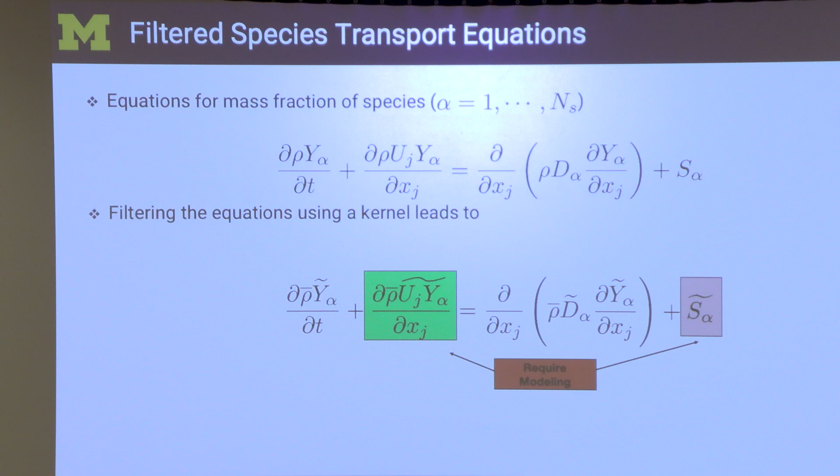Now, the chemical source term, if you think in terms of scales, is going to be active at a very small scale because reactions are confined to a very small region. So in terms of length scales, it's at a very small scale. If I say I filter that source term, I'm essentially saying all the contributions at the small scales, I'm going to set to 0, okay? Which means there is no chemical source term after that because everything is at the small scales.

So if you follow that logic, filtering that source term is the end of this whole exercise. Once you do this, the equation is meaningless. You cannot solve it. There's no point in doing LES for combustion, okay? So we have to find a way around it. Just directly filtering the equations like this is not the solution. And I'll explain this in the next few slides using certain examples so you see what the mistake we're making is quantitatively.

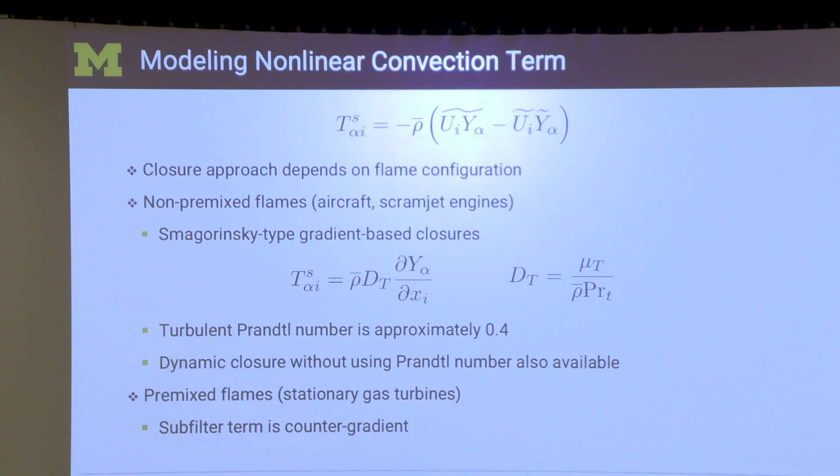So first, for that pesky UJY alpha term, which I'm going to write like this. If you remember from yesterday, that's how the subfilter stress term looks. So it's very similar, and I can use these kinds of models. These are called gradient diffusion models. Some people think it's good, some people think it's bad, but nobody has done anything better than this to this point. So we'll assume that it's a good model. This is not critical for us. It's important, but not a critical modeling requirement here. So we'll keep it at this level of exposure for this term. What is more critical for us is the chemical source term.

Okay, and of course, you guys know this. All of chemistry, if you want to model it, fuel does not become carbon dioxide directly. There are multiple steps, right? We know multi-step chemistry. So we have a chemistry mechanism, and you can use Cantera or Chemkin or whatever software you have to read in a file that someone like Professor Curran or Hai Wang or others give you, or you're the one developing this if that's what your PhD research is on, and then use it in a CFD calculation.

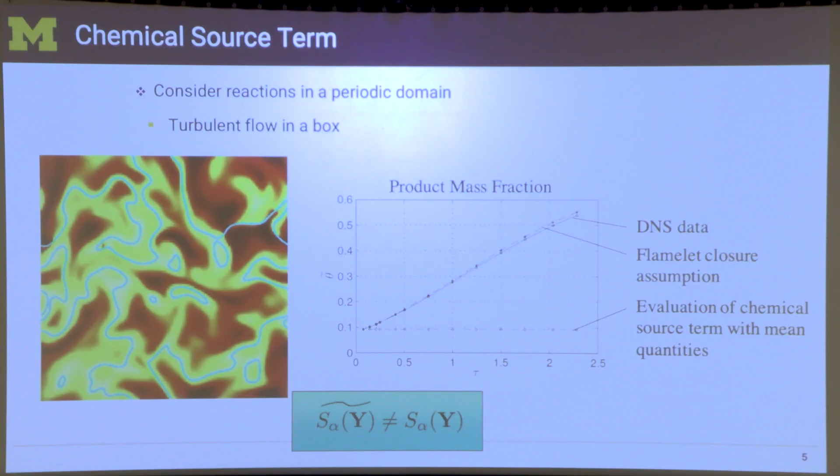In the previous slide, if you look at the equations you have, I'm going to solve transport equations for C. That will be Y1, let's say, and D, which will be Y2, Y alpha, so alpha is 1 or 2. I'm going to solve transport equations in LES for filtered Y1 and filtered Y2, filtered C and filtered D. So if I want to compute this chemical source term, if I know the filtered temperature and the filtered Y and filtered T, I can plug all of this in to compute the chemical source term. So that would be first filtering the signal for composition and then computing the source term, which is a very nonlinear function. And it turns out that that gives extreme errors. If you do this, you don't get any combustion at all, okay?

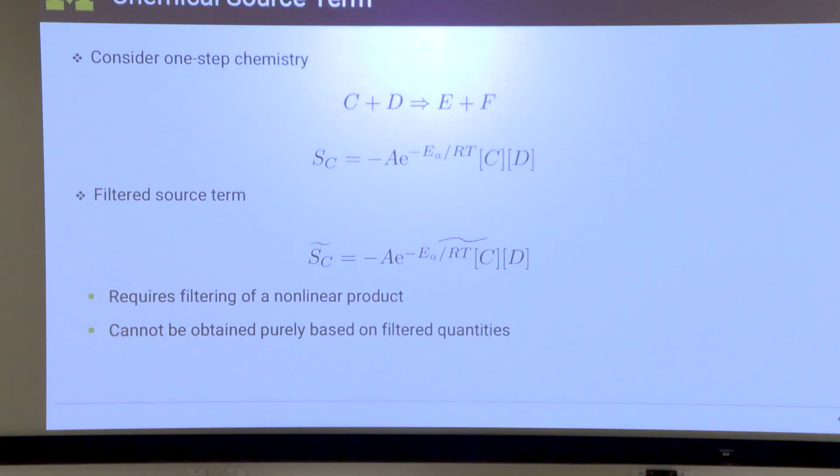So this is the fundamental problem with combustion modeling. So everything that comes after this is a way to fix it. Somehow we need to fix this fundamental issue. And there are many ways to fix this, and people have come up with many different ideas.

And there are a sequence of ideas for this from things that have been done even before LES was formulated for other kinds of simple mathematics or simple models, all the way up to more extremely modern technologies. Like, if you have the filtered signal for composition, can you use neural networks? I hate saying this, but using neural networks to figure out the filtered chemical source term, right? Stuff like that. So that's this correlation that you can try to get. So there are a lot of ideas that have been pursued like this.

So we'll go through one or two, and then I'll tell you what's the more dominant way to solve this that actually makes sense. So the easiest way to do this is this. You say that the filtered source term is evaluated using the source term of the filtered variables, which does not work out, so that's not an obvious choice. So I can come up with expansions, like Taylor series expansions. So instead of having T as being T filtered or T average plus T prime, I plug it in, and now I have a completely different expression for how to compute chemical source terms, or in this case, temperature source terms. That's a little bit more complicated, but it takes into account the fact that there is not a single temperature, but it's a filtered signal. Yeah, so you can make these assumptions there.

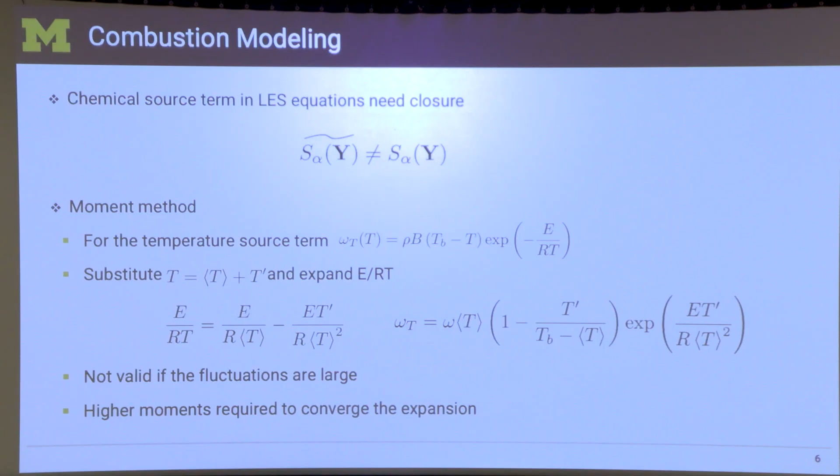What you'll quickly find is that these methods are not extensible. That works only if you have a single-step chemistry. If you have more complex chemistry mechanisms, if you want to predict pollutants or soot formation, for instance, these will not work. So you need to come up with something that's more principled. In machine learning terms, this is called physics-inspired modeling or physics-informed modeling, right? So you have to know something about the physics of the flames, and you can incorporate this into the simulations, and that way you're closer to reality than just doing mathematical expansions.

And there are many classes of methods. In fact, many of the people who give these summer school lectures, if you go back and look at them, they're all associated with this. They would have come up with one of these methods. Okay, this is a path to glory if you're a combustion researcher. You come up with your own combustion model, and then, of course, you don't name your own combustion model after yourself, which is looked down upon. But otherwise, they would have built this one.

So, for instance, the flamelet methods, which fall under manifold-based methods, Norbert Peters and Forman Williams came up with this technique. There is the conditional moment closure, which Bob Bilger and Alex Klimenko derived. I do not know where the eddy dissipation concept comes from. It predates all of LES. The transported PDF methods come from Steve Pope and originally from others in the turbulence field. And these are all only when you have diffusion flames or non-premixed flames. If you have premixed flames, there's a whole other group of researchers who do this stuff.

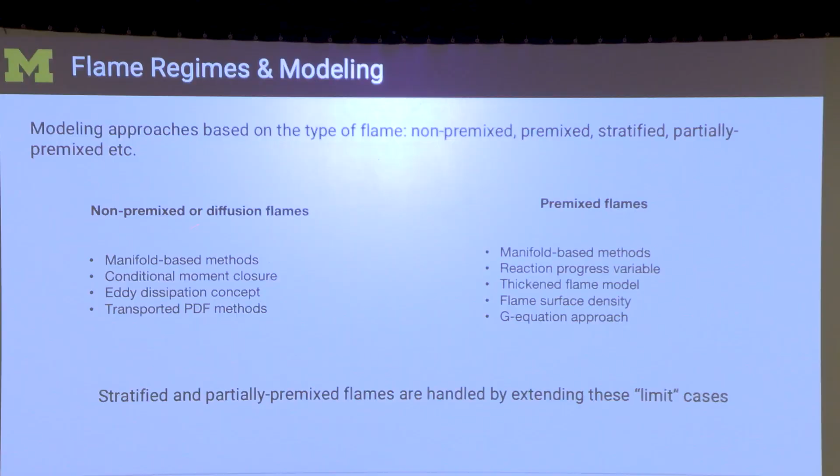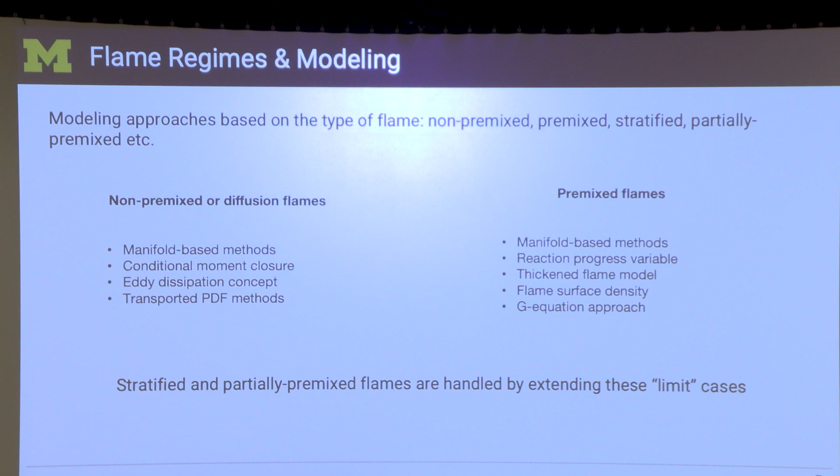Now, you have to know that diffusion flames are more popular for aircraft engines because their fuel and oxidizer are put in separately into the combustor. And premixed flames are more common in stationary gas turbines. And I don't know the history of this, but for some reason, in this country, diffusion flames are studied more commonly. And in Europe, premixed flames are studied more commonly. Not that they don't look at diffusion flames or we don't study premixed flames. It's simply that if I look at these methods, the people who build the methods are either from the US or from Europe. It's like that, right? So that's what you see from this.

Yeah? Why are diffusion flames more common in the aerospace industry? Why won't they use any premixed in aircraft engines? So if you mix fuel and air and you let it sit in any volume for appreciable time, it's dangerous, right? And aircraft engines have to be compact because volume and size are limitations. So you cannot have extra measures to ensure safety very easily. So the better strategy is to bring them in only when they need to react.

In stationary gas turbines, you can have additional measures to protect or mitigate these risks. They can be longer volumes, things like that. And so as a result, they operate in premixed. Now, there's also a secondary thing, right? Diffusion flames produce NOx. Premixed flames can be run very lean, and they don't produce NOx. And because premixed flames in stationary gas turbines sit on the ground, you do not want to release NOx at ground conditions, which can be very detrimental to humans. Not that we can release NOx at high altitudes, but that's what we do.

Models for the flames. Is there any way to couple them, or is there any model that can take care of triple flames or any sort of intermediate flames? Yeah, so although I say as if there's a stark distinction, that aircraft engines are purely diffusion flames and stationary gas turbines are purely premix flames, that's never the case. They're always somewhere in between, right? It's simply that stationary gas turbines are more towards the premix side, and aircraft engines are more towards the non-premix side. For your question, that's the bottom one.

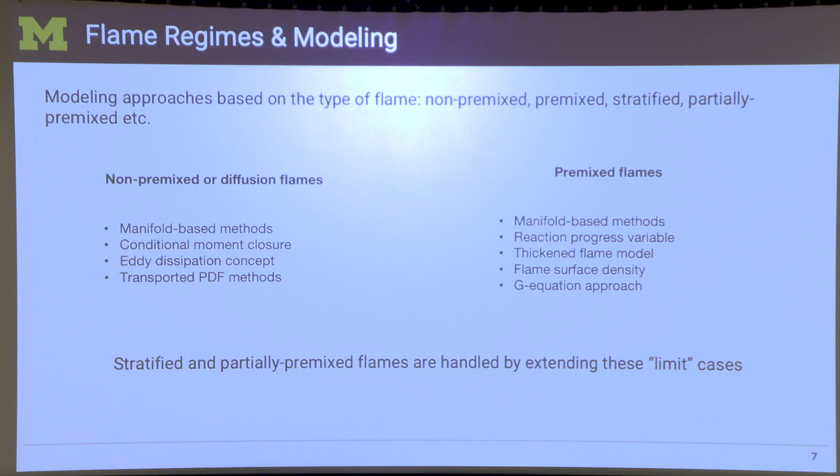Stratified and partially premixed flames are the typical norm. And so there you have a variation. If it's a premix flame, you have variation in equivalence ratio throughout the geometry, and so that's stratification. In partial premixing, you have some amount of maybe products mixing with fuel-air mixtures, things like that, and they will lead to structures like triple flames, lifted flames, and so on. Then it becomes very murky. We don't know how to deal with it, and what we typically do is some ad hoc way to extend the premixed or diffusion flame models. We have gotten much better at it, so now the manifold methods we talk about can cover a broader range. I'll show you some examples. But it's not a settled question. It's not like we know, okay, if you do this, you can solve those problems.

Any other questions? Just broadly speaking, are the combustion regimes in rocket engines for this discussion pretty much similar to that of a jet, or are there other differences? Yeah, so they're fully non-premix. That's right. They're all mixing limited, scramjet engines too. They're all roughly the same.

Is there any notion that if the fuel and air, or in a rocket engine the oxidizer and fuel, are mixed properly before the combustion, then the combustion will happen properly and emissions will decrease? Yeah, so ideally, if you can mix everything properly, and you can also burn. I'm not trying to trivialize it, but this is our thinking, right? We think if we mix properly and we can burn it well, everything will be perfect. But our limitation is fluid mechanics. If you try to mix properly, which means fully mixed, there'll be consequences for it. There'll be pressure losses. You need bigger volumes, so it may not be compact. So this is an engineering design. If you had infinite capacity to deal with some problem, then perhaps we can design things like this. But in an engineering setup, you're also fighting to make the whole thing reliable, with stability and performance over wider operating conditions. To ensure that everything works out at the same time is impossible, right? So it's always an optimal condition, but not one ideal condition.

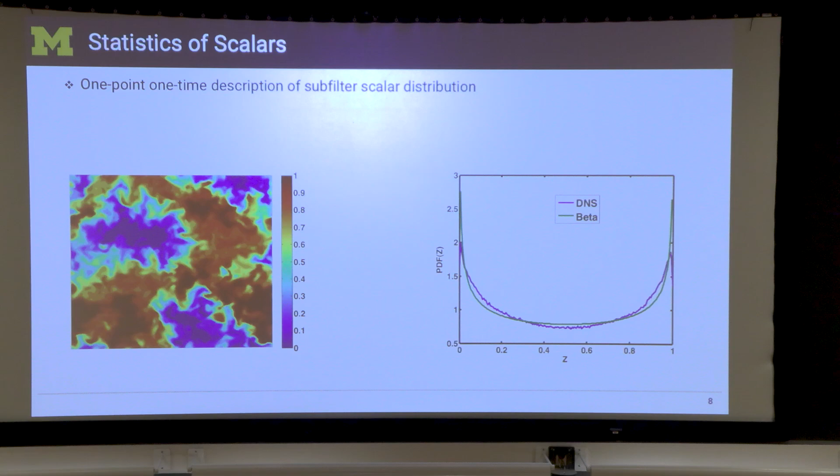So the best way to think about it, again, I show these kinds of snapshots all the time. You can think of this as one filter volume, of size delta, and inside the delta there are scales down to eta, the Kolmogorov length scale, of scalars that are being distributed. They're spread all around it. If I take a snapshot with the size of delta at any given time, I'm going to see this picture on the left. I take all those points, and this is some scalar value, so it goes between 0 and 1. Think of it like mass fraction. At each one of those points, there's a separate mass fraction. I take those numbers, put them in a list, construct a histogram, and normalize this histogram, which is when I get the picture on the right.

On the right, the x-axis is that scalar value, so it goes between 0 and 1. And the y-axis, there's no limit to it. In fact, if it's truly just a single value, no distribution, just one value, the peak of the distribution will be at infinity, okay? So the y-axis is not a count number, so it's very different. But I'll get this distribution. This is what I call a PDF, or a probability density function, okay? So I get this PDF, and this is the basis for everything that I'm going to do.

Now, I can do this for temperature. I can take a temperature distribution like this and construct a PDF. I can take velocity and do the same thing. Or I can take velocity, take its gradient, in the x direction, let's say, and then construct the same data. So all I need is a field of values, and I can construct a histogram or a normalized histogram out of it, which is what I have for this PDF here. Okay? So this is important. I first have a PDF, and everything I'm going to do after this is based on this PDF.

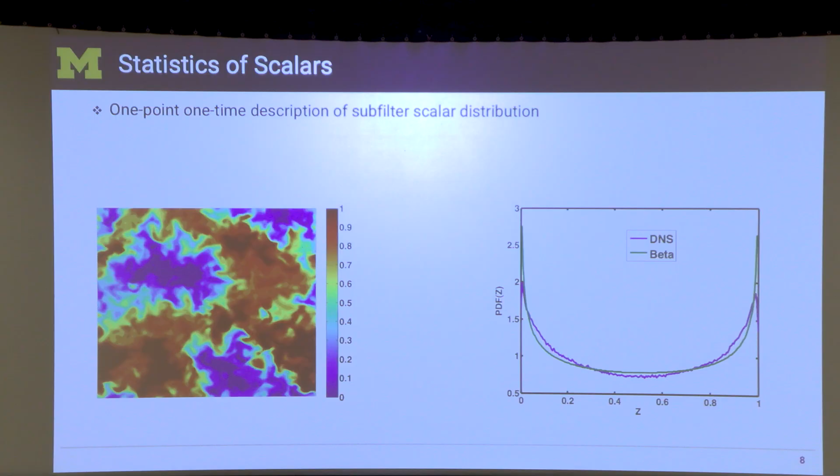So the PDF itself is not a single function that I have. It's a function that varies with space and time. If I take this at a different time and I plot it at the same location, I might get a slightly different PDF. Okay? So now I have a PDF, which is a function of both space and time. And that PDF itself is a function of the Y alpha or the mass fractions or whatever else you're plotting, right? So every PDF now, in the simplest form, let's say in one dimension, using one scalar, and in time, will be a function of the scalar, the position, and time, so it's three-dimensional already, okay?

So the PDF is a three-dimensional function for a single scalar and one dimension. If now I have 25 scalars, like a chemistry model with 25 species in it, then I'll have a PDF that will have 25 variables, and then one space and one time. Now, if there are 3 dimensions, there'll be 25 variables, then x, y, z, and then time, right? So it becomes a 29-dimensional PDF. So the function blows up very quickly, right?

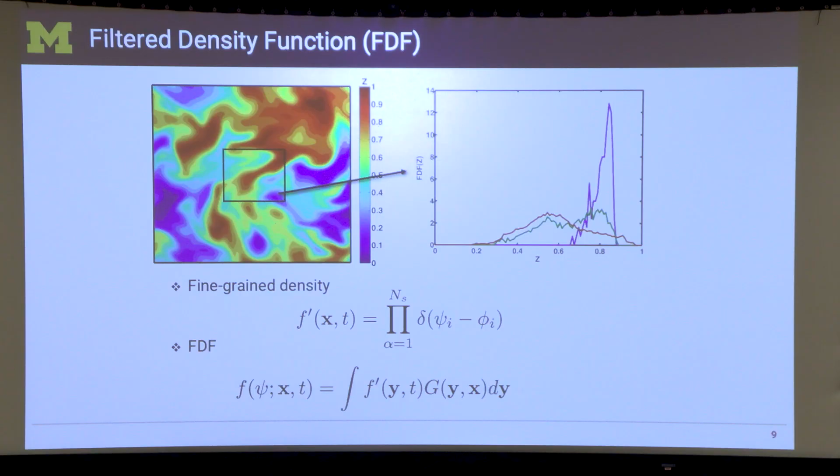Now, different people think of it differently. To me, conditional moment closure, transported PDF, manifold, they're all the same. They make approximations for what is the structure of your flame at different places. That's the only difference. So everything starts with that PDF that I just explained to you. And that's what I've written at the top, okay? So I have this PDF P, and it has an argument psi. So I have to use a lot of Greek symbols and letters here because there are too many things, right? So that's psi. And that psi itself is a vector, okay?

So it has n species. So that n could be like 1,500 if you have 1,500 species. Typically when we do simulations, these mechanisms have 10 species or 25 species, things like that. So n is going to be like 25 in a common simulation. Nobody's doing simulations with 1,500 species, right? That's not what you do. So that's your n in that psi, okay? And then I have this PDF. Now this PDF has certain properties.

You remember I took this PDF from a single volume, okay? Which means I took all the data from that volume. Now if I take all the data and I find the average of the data, that will give me the filtered value. This is the definition of a box filter. So it will give me the filtered value. In PDF notation, I write it as a second formula, phi tilde, which is my filtered species, let's say, is the weighted average of psi times that PDF. So this is the definition of a PDF. If you want to find the mean of the distribution function, you weight it by the variable, you do the integral, and what you get is a filtered function.

Okay? Now, if you haven't seen this before, this is not so obvious. It's not like d dx of x squared. It's not like this, right? So if you haven't seen this before, you just have to blindly trust me that this is the right formula. And you can verify it later if this is actually true. But this is what you get. So you can write your filtered variables using this PDF, okay?

Now, of course, the PDF itself I got by taking the data and then constructing it. So what's the point of doing all of this and then saying I'm going to get the filtered value? It doesn't make sense. So the value in writing it as a PDF is to be able to write an equation for the PDF itself. So you solve for the PDF itself, and then once you solve it, then you can find the filtered species, or temperature, or whatever else you want. So that's what you would do, okay?

So the methods that we have here, they're all based on how you solve for this PDF, okay? So if it's a transported PDF method, which is what Steve Pope made popular, you directly write a transport equation for P, and then you would solve it. It's complicated. We'll come to that later. It's not some easy thing that we think about. It's a complex equation. You cannot use CFD in the traditional way. You need what are called Lagrangian methods for it. So it's a Monte Carlo method. So it's a very different approach altogether. But that's one way.

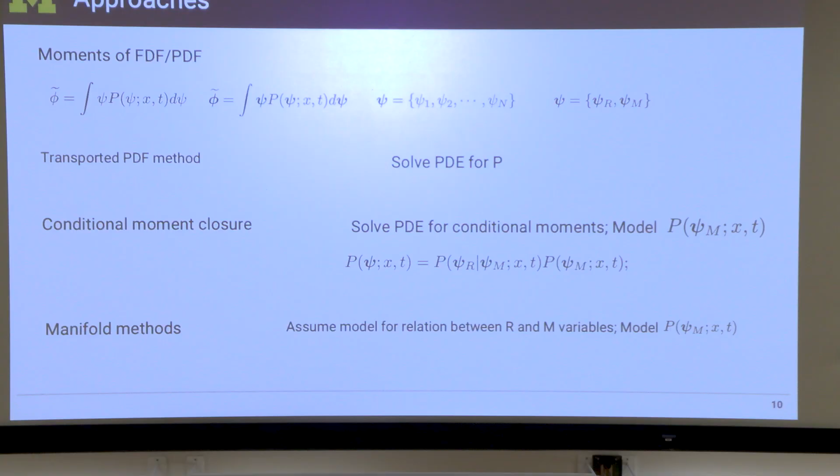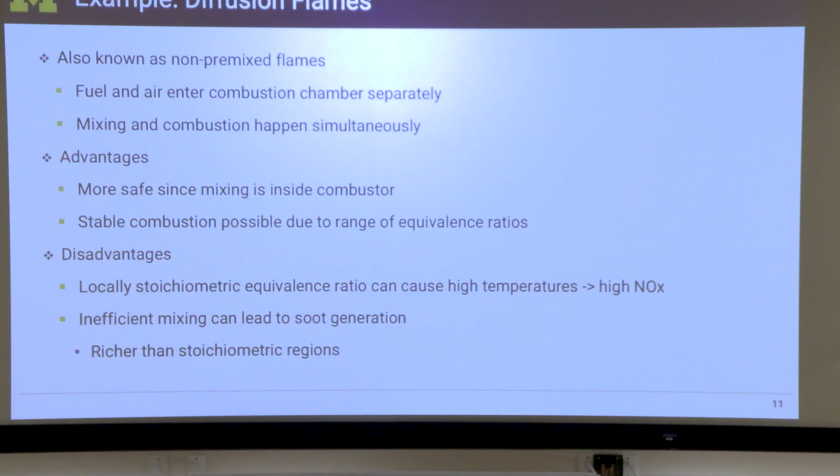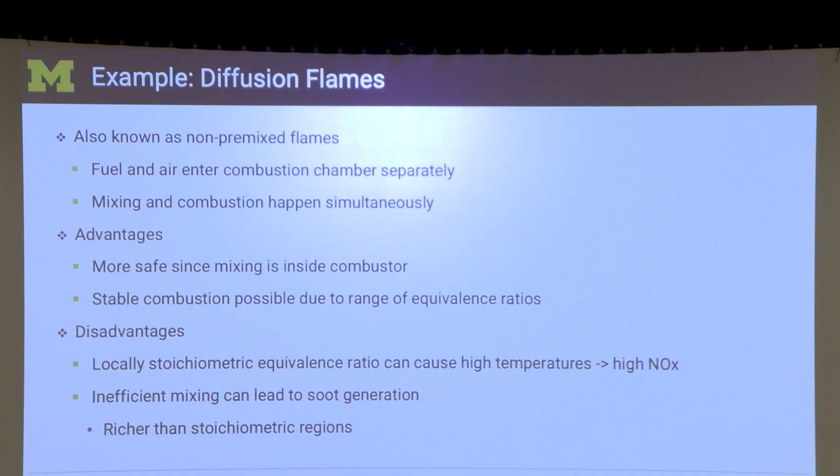So again, we are talking about diffusion flames first. You can do very similar ideas for premix flames also. The concepts are the same, so I don't have to go through each example to show how to do it. So we'll look only at diffusion flames. And if you understand how it works here, everything else is very similar. So we already discussed all of this, so you had questions on this. So all of this stays exactly the same.

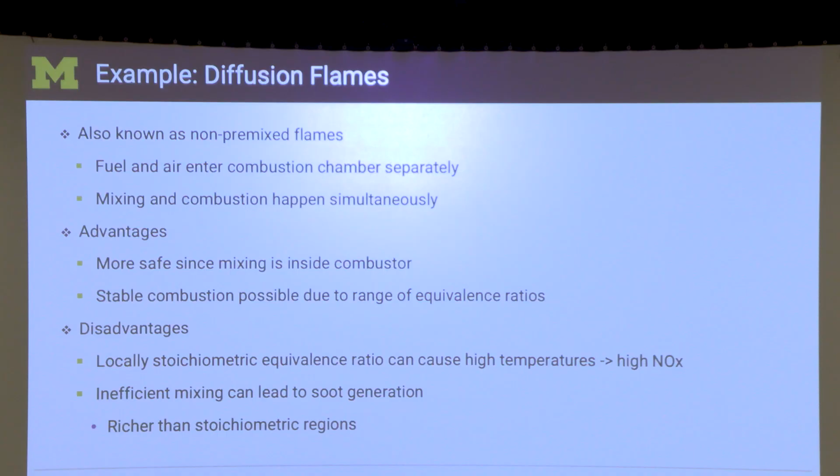So you want to use non-premix flames or diffusion flames because they're generally more stable. They're more safe, especially for aviation kind of applications. But there are also disadvantages. So locally, you can have very high temperatures. Even though the global fuel-to-air ratio might be low, locally you might have high temperatures that can create high NOx or emissions.

And if you have inefficient mixing, like in an RQL combustor, where the rich region is too rich, you can form a lot of soot that may not get oxidized, and so you'll have soot emissions. So that's possible, yeah? So there are both advantages and disadvantages, but we want to look at diffusion flames. So I'll skip this part. I'll go to what I want to look at here.

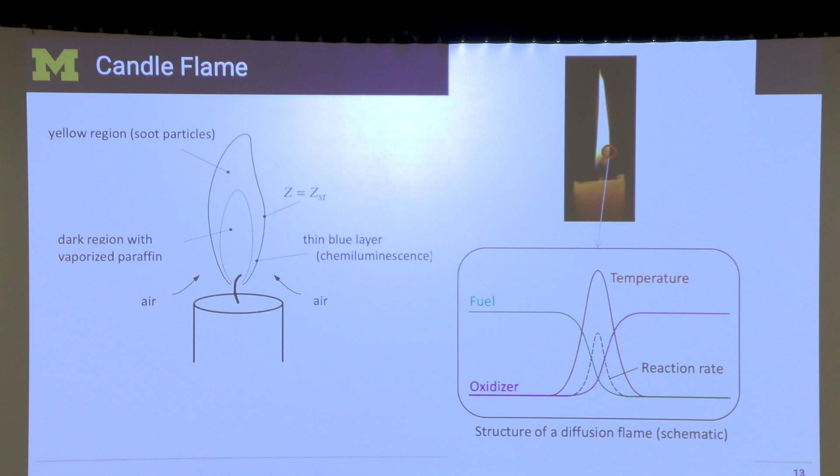So we looked at internal structure for premix flames yesterday when we discussed laminar burning velocity, or laminar flame velocity, SL, right? So here, it's a little bit different. That was a Bunsen burner that we looked at yesterday. So this is a candle, a typical example for a diffusion flame. A candle works in a complex way. It's not as simple as what I'd say here, right? It requires many different processes to happen together.

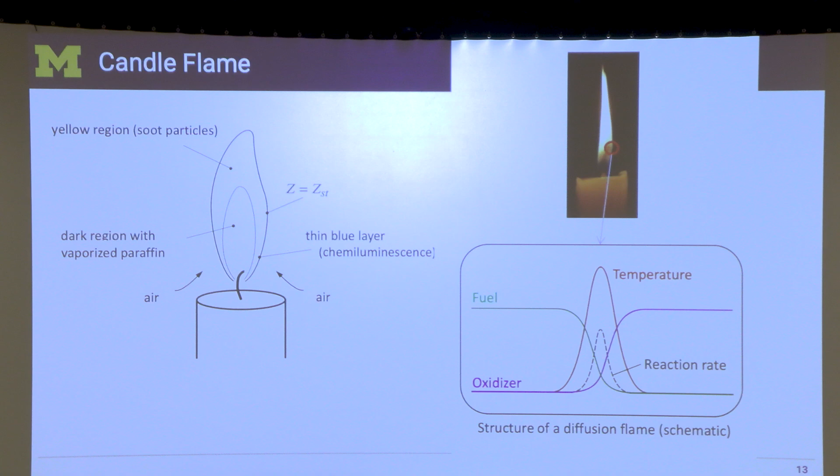But if I look at that specific region in the circle, and I look at what happens to oxidizer, fuel, and temperature, you will have a plot that looks like this. So fuel is coming from the inside near the candle wick. That's where the maximum fuel is. And as you go towards the edge of the flame, it's getting consumed. So fuel goes away. And then once you cross the flame, there should be no fuel typically, let's say. So if you look at the fuel, the leftmost part of the axis is towards the wick of the candle. So that's why it has very high fuel. As you go towards the flame, it starts going down. Under the flame, it gets consumed, and then it's gone.

Oxidizer, oxygen, is everywhere else. Air is outside in the room. So its maximum concentration is far away from the flame, on the rightmost side, the purple line. And as you go towards the flame, it starts getting consumed. And of course, if you go towards the wick, there is no oxygen left. Everything has been consumed through the flame. The highest temperature, on the other hand, is neither close to the wick nor outside in the room, which would be deadly. If I light a candle and the temperature becomes 1500 Kelvin, that's a bad idea. So it's only at the flame front, right? And so you get this peak in temperature.

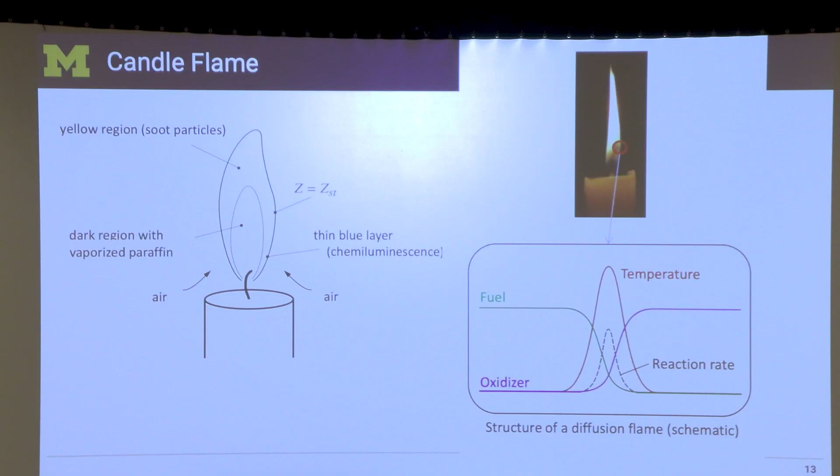This is all there is to a diffusion flame. We can think of a lot more complexities, but basically, this is it. And all we try to understand is, if you have a structure like this, what is it going to do in a practical application? Where is this flame going to sit? If I increase the velocity of the reactants, can I keep the flame lit, or is it going to extinguish? Right? Very important for aircraft engines. And if I don't burn this very efficiently, how much soot am I going to get? How much NOx am I going to get? So these are the main things I want to know. Okay? And so that's the fundamental flame structure.

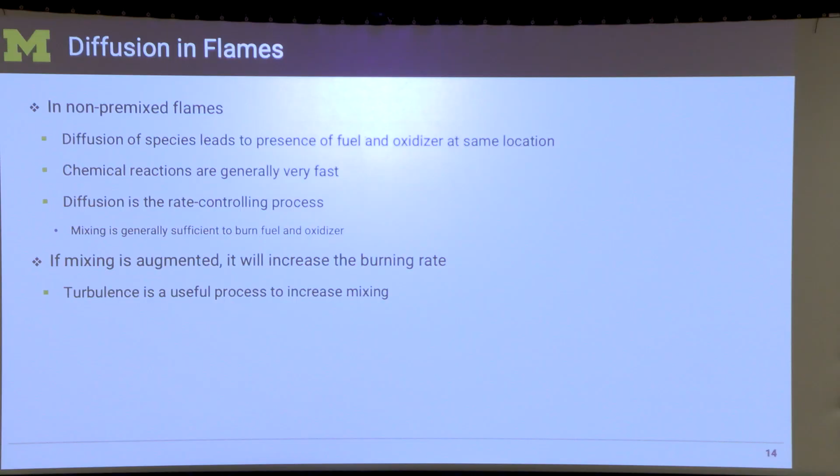And then from this, I have additional questions, especially for a turbulent flame or things like that, where I change other conditions. So I'll skip this part. So the first part of trying to model diffusion flames is to split that psi vector into psi r and psi m. Okay? And for the most basic models we have for these kinds of diffusion flames, that psi m turns out to be one variable or maybe two variables. That's it. So it doesn't matter how many species you have, those manifold variables can be only one or two.

Okay? And this is typically referred to as the conserved scalar approach. So m here would be what is called mixture fraction. I don't know how many of you know what a mixture fraction is. Okay, only very few people. Mixture fraction is the most misunderstood concept in combustion, or not understood concept, because it's defined in a peculiar way, and then we lose track of what it is, and it makes no sense after all.

So we all know what fuel-to-air ratio is, or equivalence ratio, if you want to think of it that way. That tells you, for any given reaction, fuel and oxidizer, there's a particular combination in terms of mass for fuel and air that will ensure that both fuel and oxygen are completely consumed, and then you have products. So that's stoichiometric conditions, right? You can supply any amount of fuel, any amount of air.

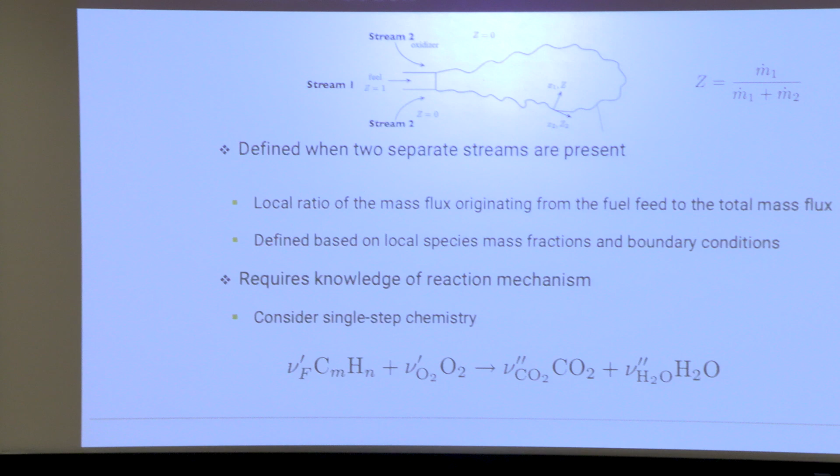So this picture I took from Turbulent Combustion by Norbert Peters. So this is the definition of mixture fraction he has in that. So you have fuel coming in. We call it stream 1. That's where the fuel is coming in. And then around it, oxidizer is coming in. So you can think of it like a jet. So there's a jet on the ground, just a hole, like this one right here. Yeah? Can you guys see this from there? Now imagine fuel just coming out of this, right?

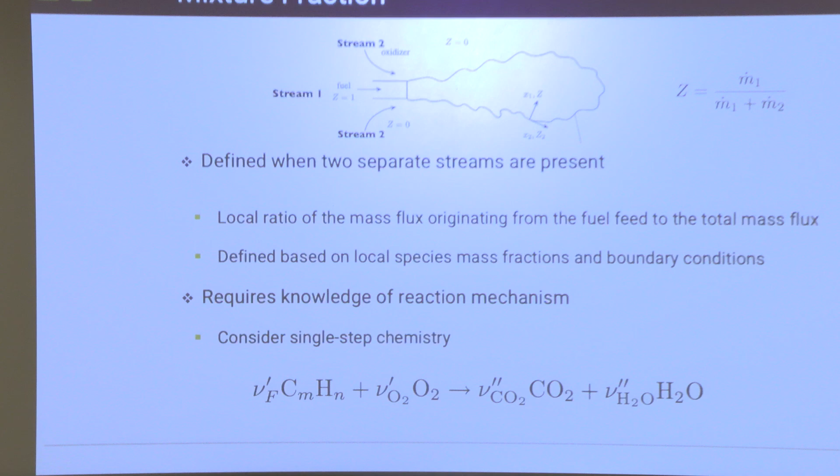So that's stream 1. Now, instead of having a cardboard around it, I could have another co-flowing cylinder or a pipe through which air comes out or oxidizer comes out. That I'll call stream 2. Yeah? So there's fuel that's stream 1, there's oxidizer that's stream 2. Okay? And mixture fraction is defined by this ratio. Now don't be confused or fooled by the definition there. Okay? So that's not exactly what we're going to use, but keep this in mind. It only depends on the ratio between how much fuel is coming in and what's the total mass that's flowing in, fuel plus oxidizer.

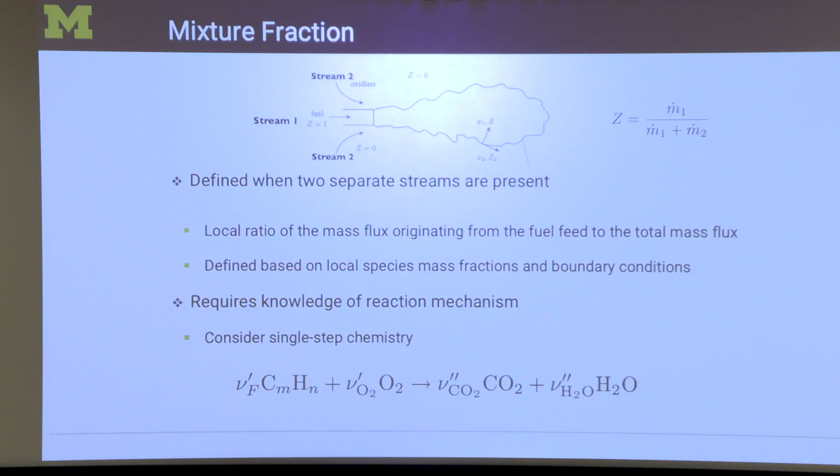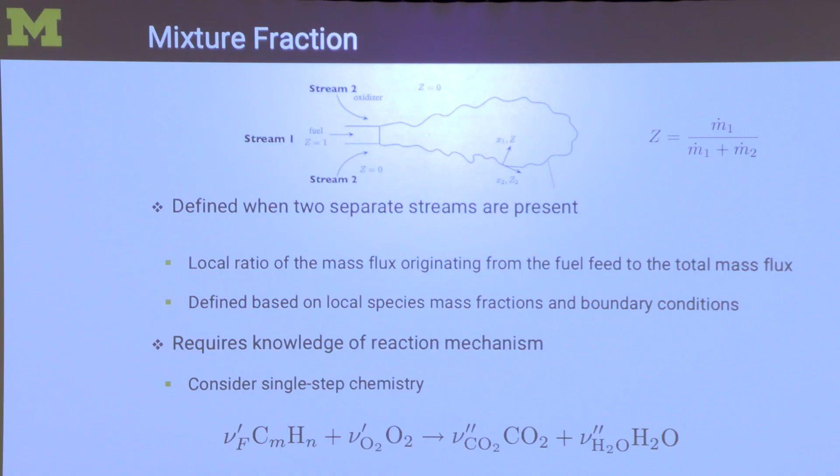You also need to know what is stoichiometric conditions. So I need to know some basic equation to say, if I have this fuel, this is the amount of oxygen I would need to fully burn it off, right? So I write some kind of balance equation, simple one-step chemistry to find that equation. But what I do afterwards is the more critical thing. I take my species equations, Y alpha, Y1, Y2, up through N, right? Out of this, I take my fuel, let's call it Y1, the first variable, and oxidizer, let's say it's Y2. The rest of it could be like carbon dioxide, all the intermediates, whatever else it might be.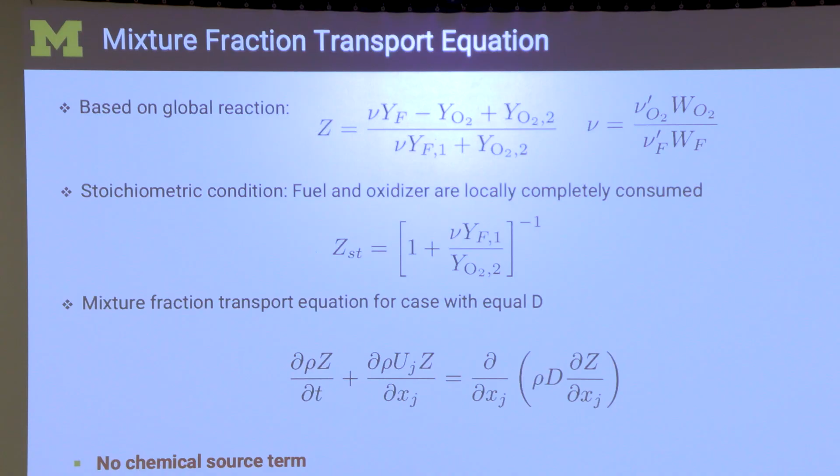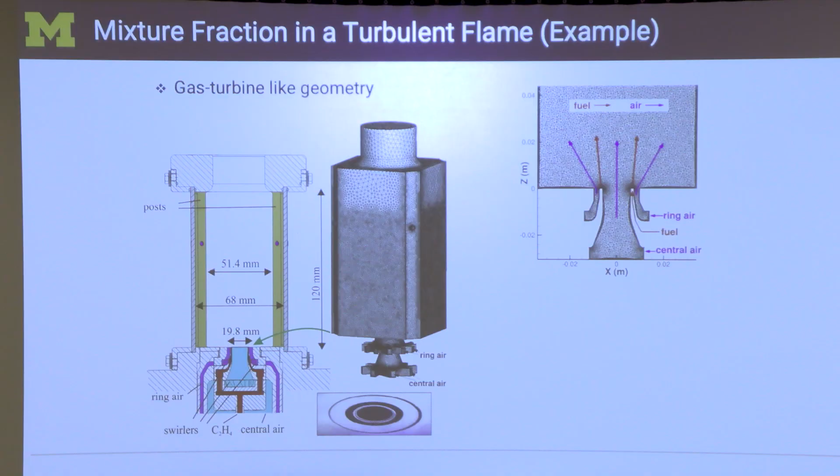So this is an aircraft-like combustor, an RQL model. Aircraft combustors are not rectangles, right? The cross-section is not a rectangle. So this is what you can study in a lab, because with a curved surface it's hard to pass a laser through. So it's made into straight sections. So it's a model aircraft combustor.

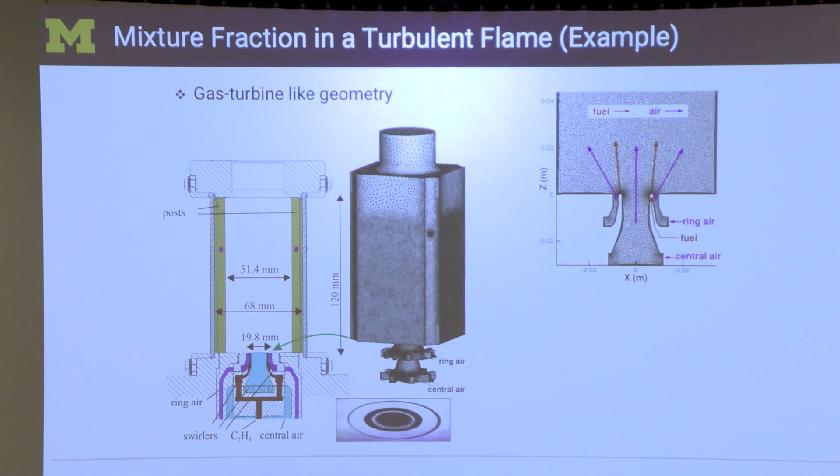And if you look at it, there are many complex gadgetry to feed in fuel and oxidizer. But in the end, you get one small region through which fuel comes in and two concentric circles through which air comes in. And they'll come in, they react, whatever. They do things inside the normal engines should do.

But what I can do is I can plot mixture fraction by solving that equation that I told you. And so that's an instantaneous picture. And this is the average, time average picture within the geometry.

And what you see is that very close to where the fuel comes in, that mixture fraction value is like 0.3 or something. It should really be 1, because when it's only pure fuel, it should be 1. But because we're doing CFD, there's some diffusion, things like this, so it's a little bit lower. So you see a max value of 0.3. And where oxygen comes in, that value is close to 0, okay, because there's no fuel there.

So I've set up myself a scheme where wherever the fuel is being injected, I set the mixture fraction value at that boundary to be 1. Wherever oxidizer is being injected, I set the mixture fraction value to be 0. Okay? So when Z is 0, I imply the oxidizer stream, and when Z is 1, I imply the fuel stream. Okay? And when they mix, you're going to have values in between 0 and 1, and those tell you how much fuel and oxidizer are present at a given location.

Okay? Now, this is a marker. You know, when the fuel and oxidizer go in, they're going to react. Okay? And if you've designed this properly, by the end of the domain, everything would have reacted. All the fuel is gone, all the oxidizer is gone if you're at stoichiometric condition overall. Okay? Mixture fraction does not care about it. If you look at the top, the mixture fraction is not 0, but it's close to like 0.1 or something like that.

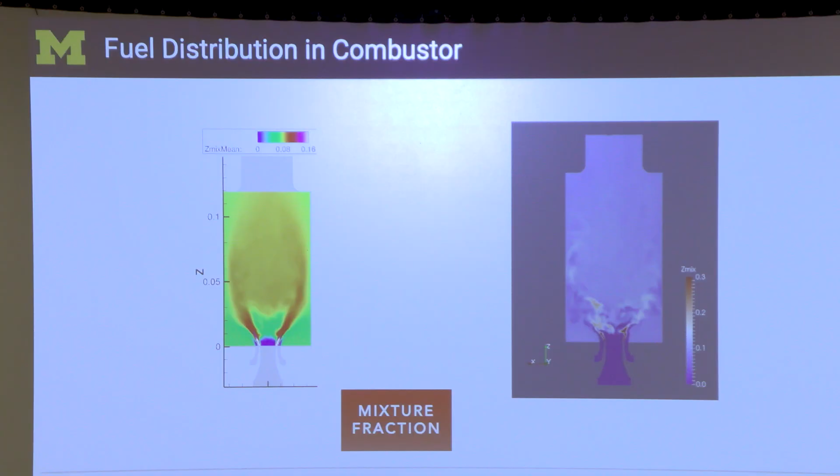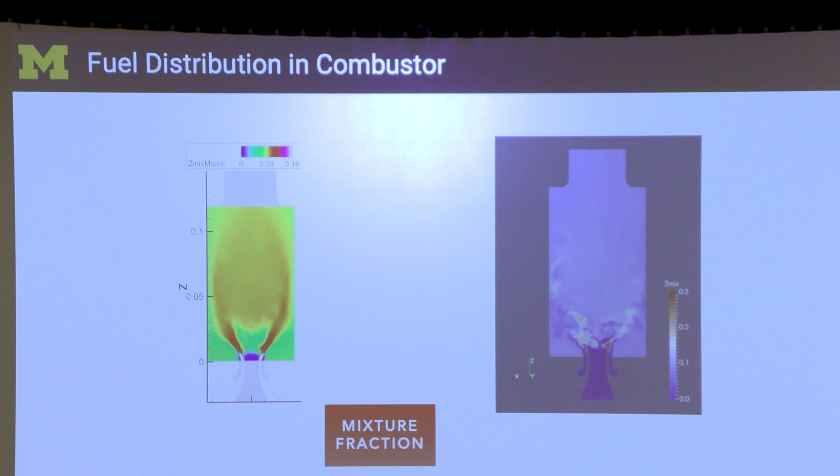Okay? Mixture fraction only measures, if there are no chemical reactions, how much of the fuel came from the fuel stream, how much of it came from the oxidizer stream to a particular location. It's measuring how much of those fluids came to any given location inside the domain. What happens after that, it has no indication of. Okay? So this is the important concept about mixture fraction. It tells you how fuel and oxidizer, when there's no reactions, how do they flow into this system? Okay, so it's a marker for the amount of fuel at any given location.

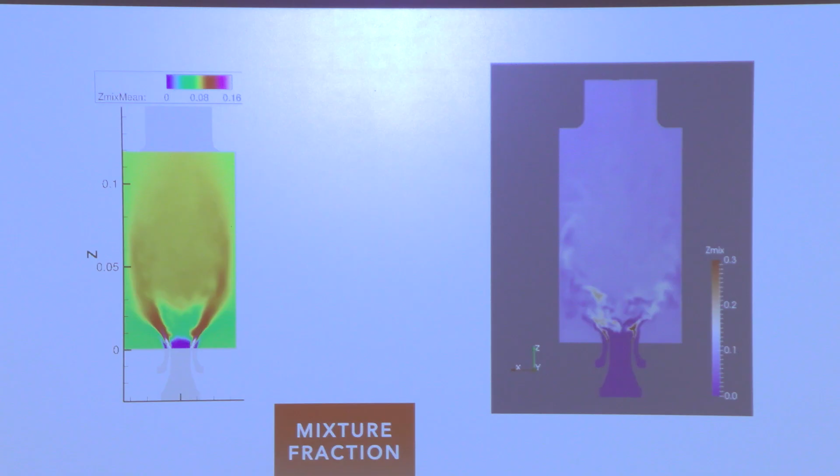Now, there's a stoichiometric mixture fraction, which is some value between 0 and 1. So I think for RP2 or n-dodecane or something like that, it will be like 0.06. That would be the stoichiometric mixture fraction for that fuel and air that's burning. If it's hydrogen, the stoichiometric mixture fraction will be very small. I forget what the number is, but it could be like 0.01 or some small value.

Okay? So that tells you if you find within any given location in that domain some value that's the stoichiometric mixture fraction, at that location, the fuel to air ratio is the same as the stoichiometric fuel to air ratio. Okay? So that's what that tells you. So if I can solve this field, I now know at any given location from the inflow how much fuel and oxidizer have reached that location. Okay? So this is an estimation, this is a marker. So I will use this to do the rest of the modeling.

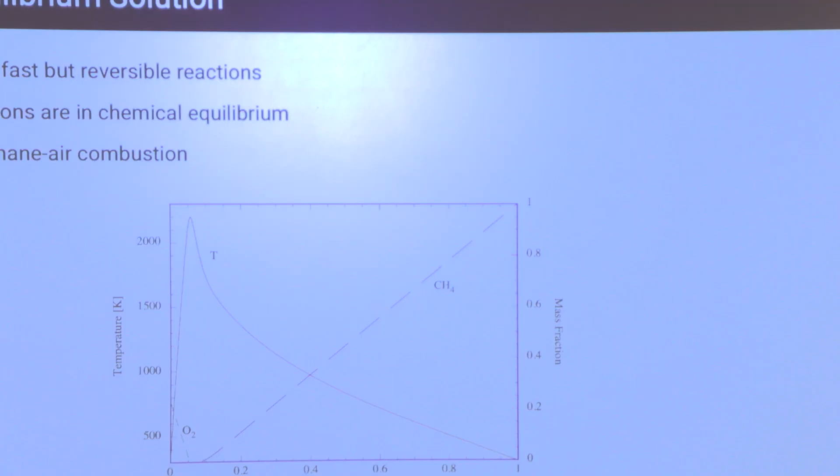So the simplest way to say, and this is an approximation, is to say whenever fuel and oxidizer reach a particular location, they immediately burn and reach equilibrium values. Okay? Which is a very stark approximation. This is not how the world works, but I'll make that assumption. So then what I do, I use Cantera or Chemkin or whatever. I take different mixture fraction values, different fuel to air ratios. I equilibrate that mixture. I find out what is going to be the temperature, what's going to be the product concentrations, all this stuff.

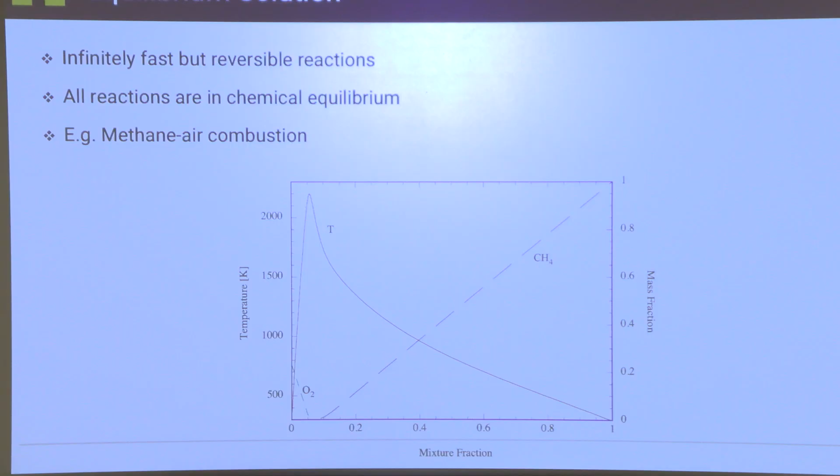And I store it in a table, in just, let's say, for lack of a better term, in an Excel spreadsheet. Okay? So I take mixture fraction values, and for every value between 0 and 1, let's say I take 100 values, like a grid of 100 values, I compute what is the temperature if I reach equilibrium with that mixture, and I store it.

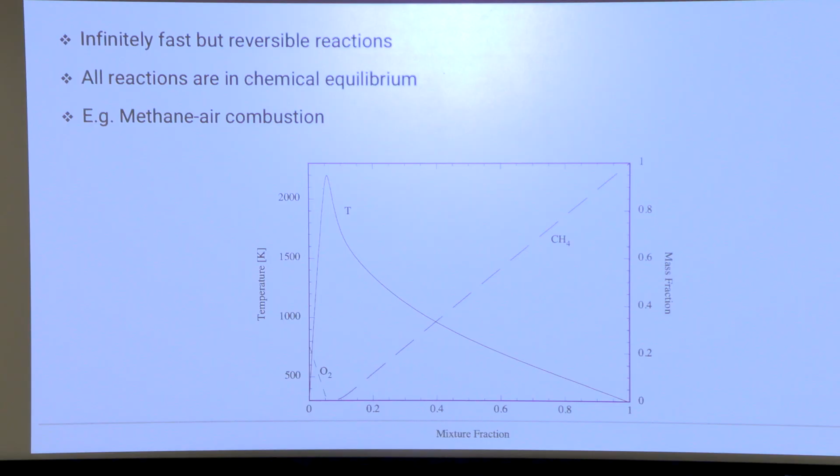Okay? Now, when I do the simulation, all I'm going to do is to map that equilibrium solution directly onto the solution. So I will go to every point in the domain, the picture I showed you, and I'm going to say, what is the mixture fraction? And I'm going to look up this Excel spreadsheet. Maybe for Z of 0.2, the temperature is 1200 Kelvin.

So I just put that number in that cell, and now that's my temperature. Okay? So I have a one-to-one mapping between mixture fraction and the solution that I want, the species concentrations that I want. Because I've made an assumption that the reactions are so fast, they reach equilibrium instantaneously. That's the flame model that I've assumed. So if I do this, all I need is this mapping. Okay? Now, this is regardless of LES or anything like that.

I can take DNS, I can write the DNS equation for mixture fraction, and I can solve the DNS equations, and at every point I get mixture fraction, I can find what that species value is going to be from my table. Okay? If you do LES, you have to do the extra step, right? Because you do not have the original DNS variables, you have only the LES variables. So instead of having Y, I need Y filter, and to get Y filter, I'm going to take that mapping, that table, and convolute it with the PDF for mixture fraction. So this is my manifold method.

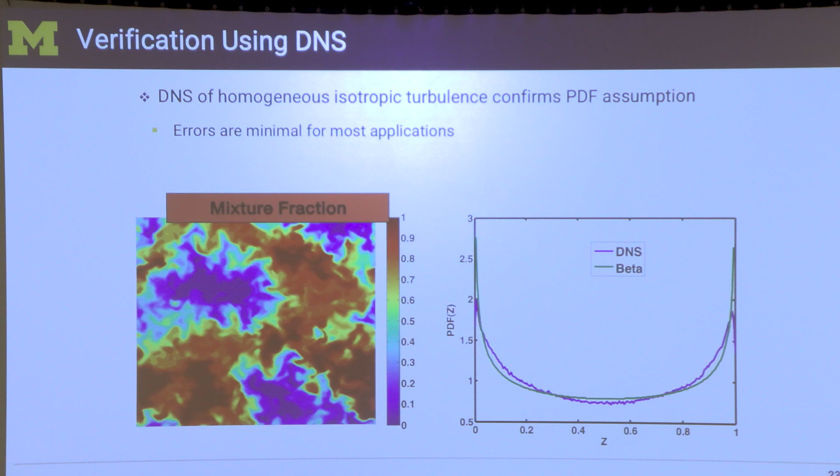So it's 3:05, 1 hour and 5 minutes. So let's take a break.